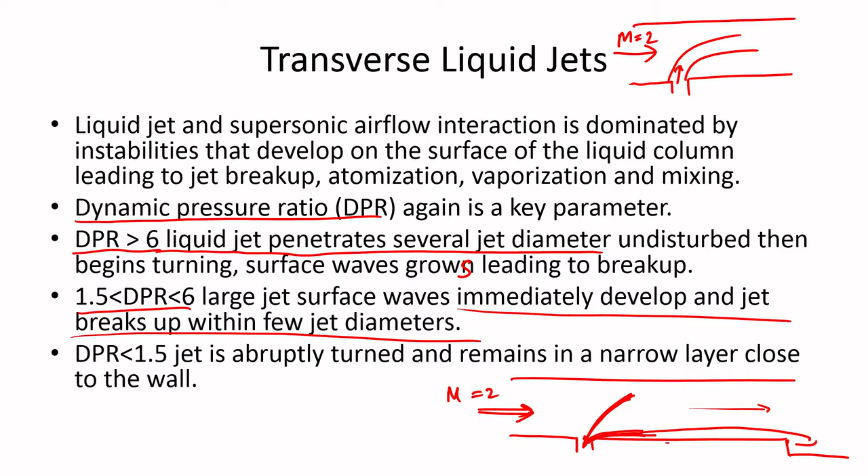Now, what fuel do you use? Of course, one can use different kinds of fuels like JP10, JP7, etc. But once again, to recap, we discussed jet fuels, which are essentially a mix of different things. The reason we come to Jet A is that we now want to understand what the characteristic ignition delay in a scramjet engine can be.

So, if Jet A is our choice, then we have to know the fundamental constituents of Jet A and what kind of surrogate fuel we can use to represent it, and then we can find the 0D ignition delay for that fuel-air mixture at scramjet-relevant conditions. That will give us some idea of how much time ignition takes and whether ignition is at all possible in a scramjet, where we have an approximate idea of the flow residence time scale.

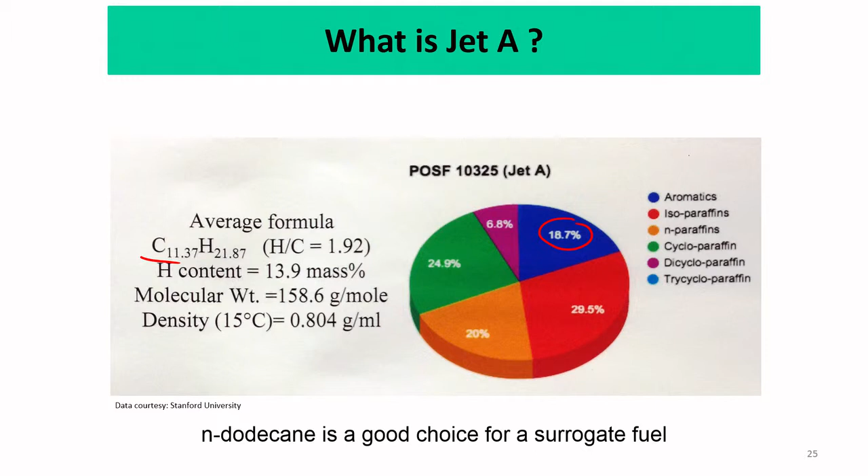So, what is Jet A? As we discussed before in the kinetics class, Jet A has an average formula of about C11.37H21.87. It contains a lot of different kinds of paraffins, n-paraffins, isoparaffins, etc. It has some amount of aromatics also, but the rest are reasonably paraffin. That is why people think n-dodecane is a good alkane to represent Jet A.

So, you have a negative temperature coefficient and your time scale is also quite large relative to the scramjet flow residence time scales. In a 1 meter long scramjet, if the flow velocity is 1 kilometer per second, the flow residence time scale is of the order of 1 millisecond. So, from the 0D ignition delay, where you have not considered mixing, atomization, evaporation, anything, the pure ignition delay for a homogeneous n-dodecane-air mixture undergoing auto ignition is itself 1 millisecond.

Okay. So that is why, but you have to understand that now if you want to design a scramjet engine, or you want to predict the performance of a scramjet engine which uses kerosene as a fuel, it is imperative that we use a detailed reaction model, because this time scale of 1 millisecond of this ignition delay and this NTC behavior that you see here cannot be captured by one-step chemistry. So that is why in scramjet engines it is often suggested to use detailed reaction mechanisms.

But of course if one is using a very reactive fuel like hydrogen, where these things are not important, then in that case one-step chemistry might be good enough. So once again, we discussed this before, just a recap. So now this gives us an idea of the auto-ignition timescales, which is about 1 millisecond.

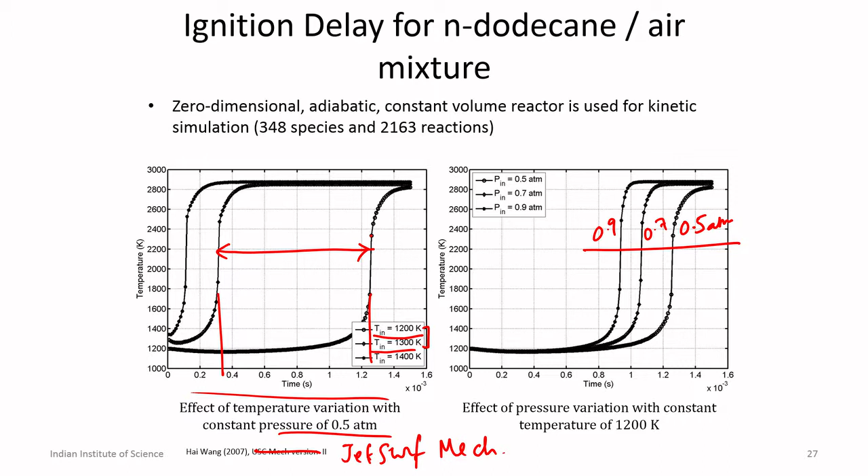But of course pressure has some effect, but it is not as sensitive as temperature. To recap, with a change of temperature of just 100 Kelvin, and in combustion 100 Kelvin is nothing, right? Just by a change of about 100 Kelvin, from 1200 to 1300, your ignition delay drops from 1.25 to essentially 0.3. So it's almost a factor of 4 drop in the ignition delay. This has to be remembered when you calculate the ignition delay time of a scramjet engine.

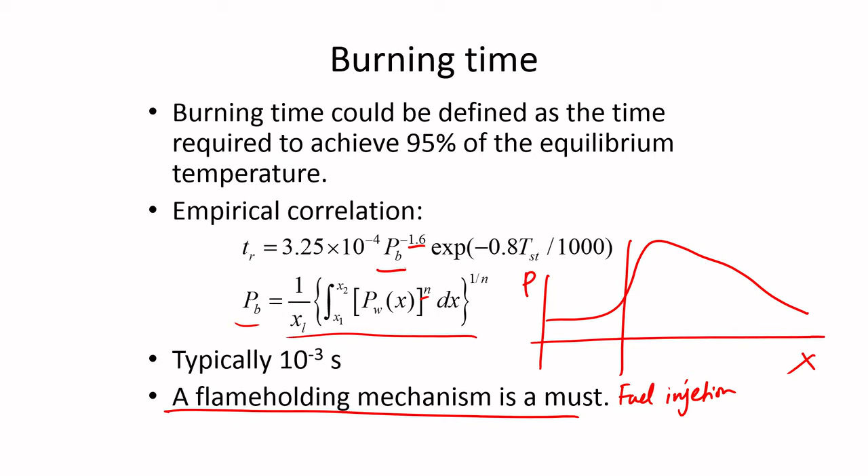In a combustor it might be even smaller than that. It's of the order of that. So it might be 1 millisecond, 2 milliseconds, 3 milliseconds to 10 milliseconds. So 1 to 10 milliseconds depending on the flow conditions. But if the burning time is of the order of 1 millisecond, then of course you cannot expect that you can just inject fuel into the oncoming high speed supersonic air at Mach 2 and it will burn on its own. And there we cannot have flame stabilization that way.

So this calls for a need of a flame stabilizer, and in scramjets you can have either a cavity stabilized flame or a strut stabilized flame, which will come. But before going into that, just to give you an idea of how the flame inside a scramjet looks. When you inject the fuel, as you have seen, that leads to the formation of a bow shock and surrounding the barrel shock, because the fuel jet poses an obstruction. So this is a hydrogen jet injection in a cross flow of air at about Mach 2.4 at static temperature of 1400 Kelvin. This comes from the work of Gamba and Mungal, recently published.

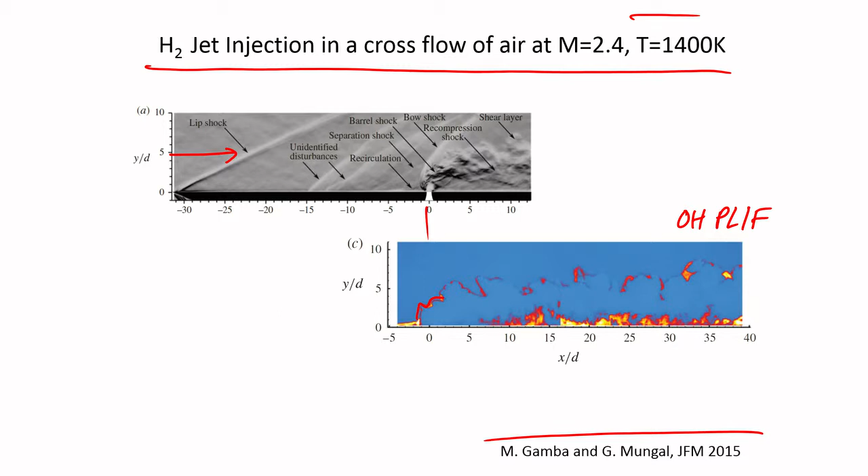So when you inject this hydrogen jet at this point, this is the OH PLIF images by the same technique we described previously. Due to the high temperature of this air stream, the flow is coming from here and you are injecting the jet here, and you see this bow shock forming, and then there's a barrel shock forming here, and of course there are different other structures forming all throughout. Now this jet induces compression, and this shock induces compression and also temperature rise, and that causes immediate auto ignition. Of course the actual static temperature of the flow is also quite high.

As you see here, this kind of flame is forming, but the flame that you see here is a very strange looking flame. The OH normally does not happen in bulk. Instead it is in a threaded form, like this. You see the flame being scattered all the way along, both in the front of the jet as well as in the back of the jet. And people think that this can be an example of the broken reaction zone regime. These flames belong to the broken reaction zone regime of the turbulent combustion regime diagrams that we have discussed.

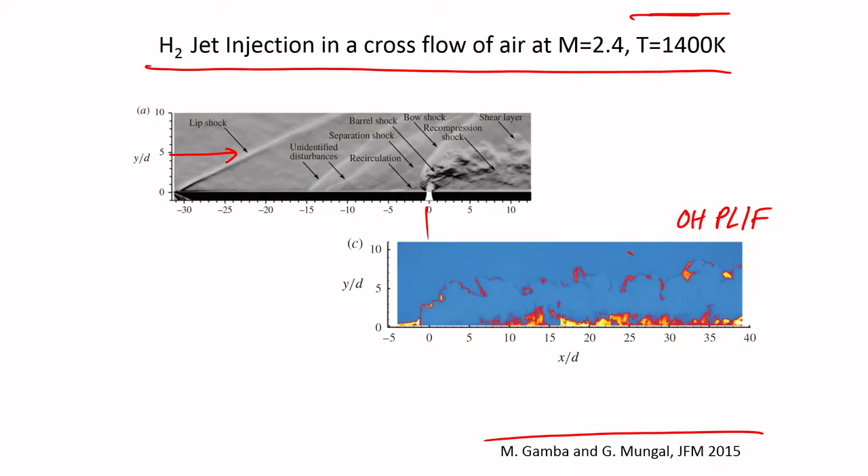So as such, that happens when the reaction time scales are much larger compared to the Kolmogorov time scales. That is when you get this kind of broken reaction zones, and people think that this is probably what is happening here. Now, as you see, if you just inject in this thing, it's very difficult to realize a robust flame. So that calls for a need of flame stabilization. One of the flame stabilization mechanisms is by using a cavity.

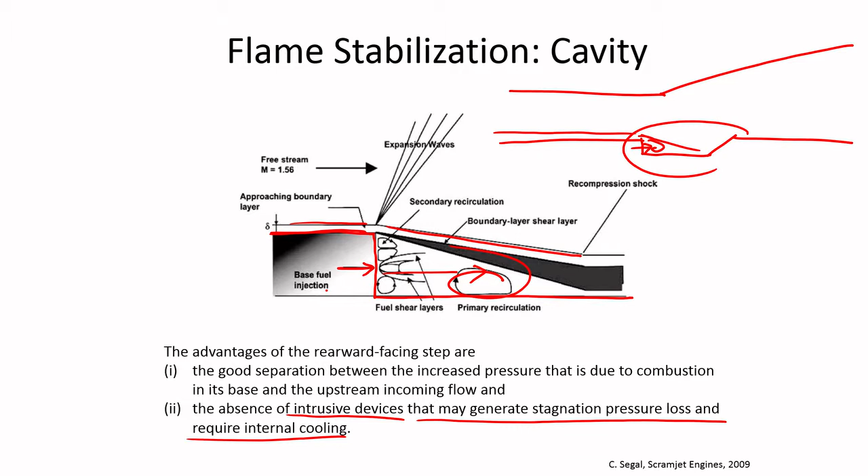Okay. The advantage of this kind of a rearward facing step cavity is that you can essentially shield the flow from the pressure rise that happens due to combustion. And second is the absence of intrusive devices. If you include a flame holder, that may generate stagnation pressure loss and might require internal cooling, because if you put a strut just like the bluff body we have seen before in the afterburner, the leading edge of the strut will see temperatures equal to the stagnation temperature of the flow, because the flow has been stopped there. And if that is of the order of 1600 to 1700 Kelvin, for long term operation you might need some cooling. And also it can lead to some pressure loss.

So, that is why some people prefer cavity, but the only issue is that in the cavity your combustion is restricted to the sides. So, the main flow does not see combustion. So, if you want to generate a lot of thrust by accelerating the flow, you have to somehow ensure that a lot of the main flow gets into the cavity, and you cannot have a very large divergence immediately, because then it can lead to flow separation. So, there are advantages and disadvantages of cavity, but this is definitely one of the two ways by which flame is stabilized inside a scramjet combustor.

So, the next one we will talk about is flame stabilization using struts. This work will report the DLR scramjet experiments reported by Guerra et al, and the computations have been reported by Genin and Menon in AIAA 2009. So, we will just examine this as a case of how a flame is stabilized by a strut in a scramjet type of combustor.

So, here we have a Mach 2 flow coming in from the left to the right, and the temperature is 340 Kelvin. So, you need additional ignition mechanisms, and the strut has a divergence angle of 12 degrees. And now, you see here you cannot place a bluff body like what you place in an afterburner. Because if you place a bluff body, immediately there will be a normal shock formed, and this normal shock will make the flow downstream subsonic, and the whole concept of the scramjet combustor breaks down. So, you have to design this strut very carefully; it can only have a very narrow edge angle, and it cannot block the flow too much. So, that needs to be carefully chosen.

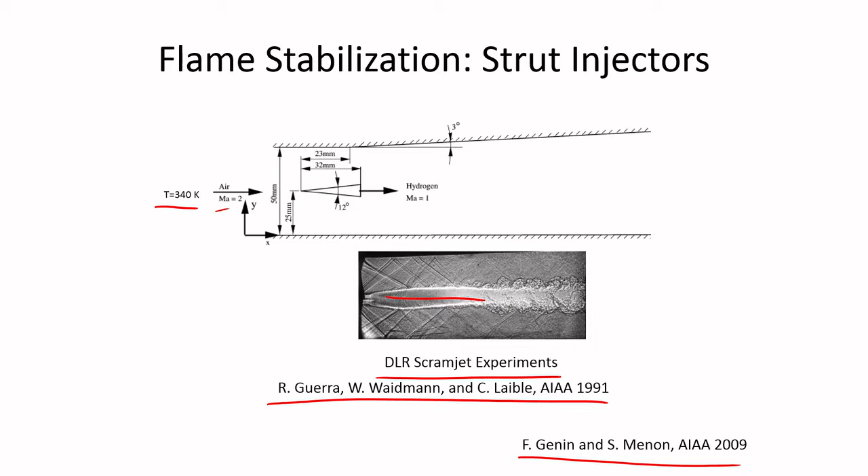Okay. So, here because it will have heat release, they had designed a combustor with a 3 degree divergence. As you see, the top wall and the bottom wall are not parallel. The top wall diverges at an angle of about 3 degrees, and the strut has a divergence angle of about 12 degrees, and from the center of the strut you are injecting hydrogen at Mach 1, whereas the incoming air is coming at Mach 2. So, this is how the Schlieren image of this hydrogen air flame looks like, but we will go into that.

So, now we have not really discussed large eddy simulations for doing compressible reacting flows. So, in this last lecture we will just show you that this kind of complex scramjet combustor can be simulated using large eddy simulations. So, large eddy simulation is kind of intermediate between direct numerical simulations and RANS.

So, for example, in direct numerical simulations you solve for all scales from the combustor size to the Kolmogorov length scales. In RANS, you solve for only the average, either the arithmetically averaged ensemble average variables or the Favre averaged variables.

In LES, what you do is solve for filtered variables. In these filtered variables, what is contained is the information from the larger scales to some intermediate scales which belong to the inertial range. So these barred variables, for example this rho bar, is essentially the non-density weighted filtered variable.

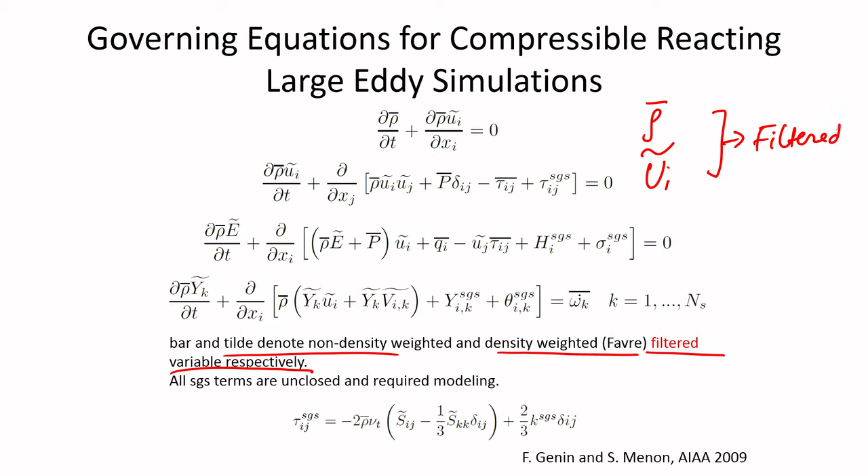So, in LES, large eddy simulation, you create first governing equations that describe the evolution of these filtered variables, and this tilde denotes the density weighted filtered variables. For example, U tilde here denotes the filtered variables. So with this you can capture large scale dynamics and have models for essentially the small Kolmogorov scales.

So, this is your continuity equation once again for this filtered variable U_i tilde. This is the momentum equation. You see the emergence of these tau_ij SGS terms. These are similar to the Reynolds stress terms that you encountered in RANS, and you have to essentially model for this. This is your energy equation, I will not go into that, and this is your species equation.

So, once again these equations look very similar to the actual governing equations, but they are more complex because they have many more terms due to these subgrid scale terms that arise, which are kind of like the Reynolds stress terms, the u_i u_j term, which you remember arrived when we averaged the Navier-Stokes equation. Similar to that, these terms arrive in the momentum equation, the energy equation, the species equation, and one has to have a closure model for that.

For example, in this case, this tau_ij SGS is closed by an eddy viscosity type of closure, and then you solve for this K SGS, similar to the K-epsilon model. But this is much more involved, and it gives you much more insight. So, this is just to show what these simulations can do, and they can capture very many of the interesting physics present in these kinds of flows.

So, here we are showing the density gradients obtained from these large eddy simulations, and often these are close to experiments and sometimes they are not. So, still now large eddy simulation for high speed turbulent combustion is a research topic. A lot of advancements have been made, but it is not closed, and there is room for a lot of work, both in developing algorithms or numerical schemes, and

in terms of fundamental understanding. So, what I want to show here is that we compare the density gradients from the non-reacting and the reacting flow. Of course, you see that they are different, but first let us look at the non-reacting flow part. Here the supersonic flow is coming from the left to the right, and here also the supersonic flow is coming from the left to the right.

So, as it comes from the left to the right, it encounters this wedge shaped body, and as it is deflected by the tip of the wedge, you have these two oblique shocks being formed. Let us call this A and this B. Now, as they impact the upper and lower walls, they reflect back towards the center line of the test section, and the impact of the shock on the upper wall occurs downstream of the location of the divergence.

So, you see that this shock interacts with the wall after the divergence has started. As a result, the whole shock structure does not remain symmetric with respect to the center line anymore. So this changes the symmetry, and you see that the center line of the shock structure has deviated from the center line of the constant area section.

So you see here that the impact of the shock on the upper wall occurs, of course, downstream of the location of the wall divergence, and as a consequence the oblique shock interacts with the upper wall expansion fan that is created at the corners of this flame holder. So these are the expansion fans which are created because the flow is diverging.

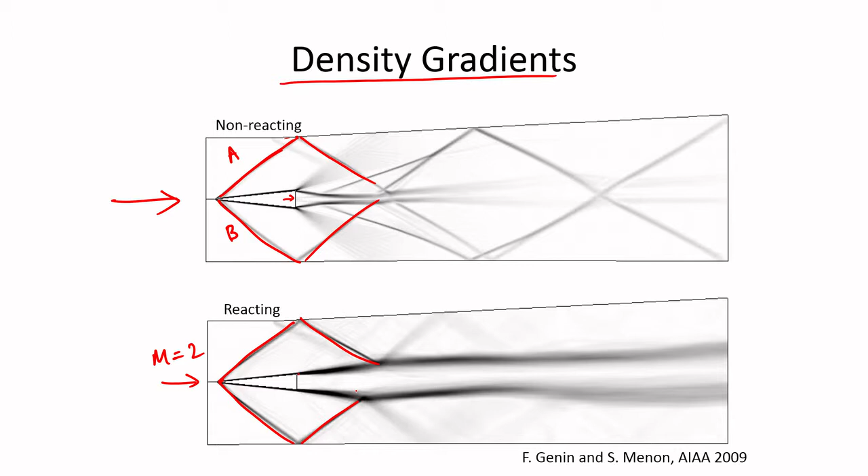So, this is the dynamics of a strut stabilized scramjet flame, and as you see here, if we extract the temperature profiles from different locations from the simulation, and validate that with the experimental measurements, the experiments do correlate well with the simulations.

Okay. So, this provides some amount of confidence in the simulations, but of course one has to be very careful. These simulations are hard simulations, and there is a lot of effort that goes into modeling as well as in the algorithm development for these kinds of things.

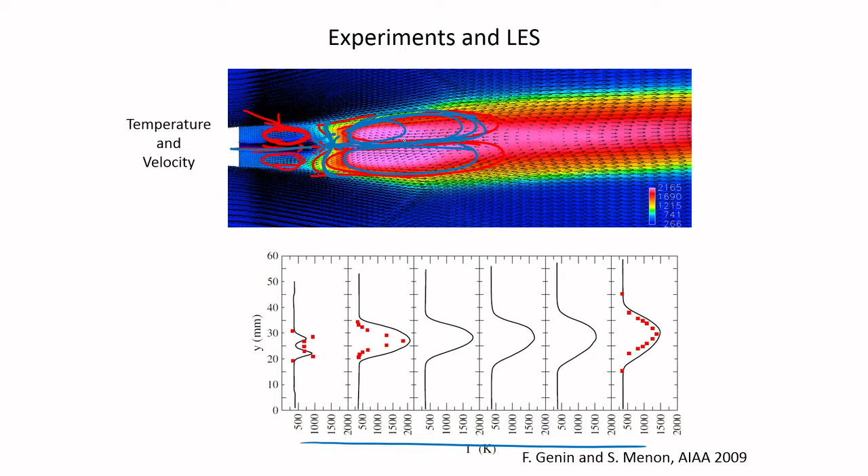So, with that we come to some of these instantaneous temperature fields and how they look. As you see, because the flame is stabilized here, and the recirculation bubble is formed here, you see in the instantaneous picture also that the flame is lifted up from the bluff body, unlike the case of subsonic flames, where the flame is attached to the bluff body.

Okay. Here the flame is lifted up from the strut, and that is happening because as the jet is penetrating, it meets with the recirculating products somewhere around, and that creates a stagnation zone, and that becomes the stabilization location of the flame.

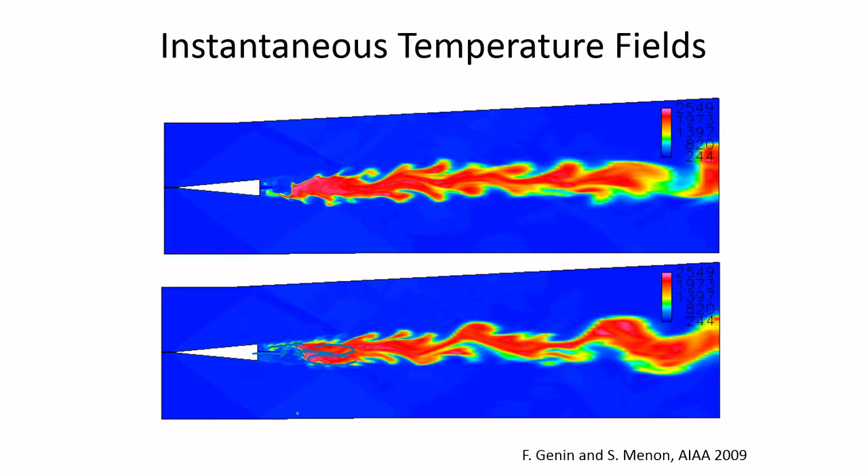But occasionally this flame structure that is formed due to some low velocity regions can penetrate, and it can get attached, but normally it is lifted up from the recirculation zone immediately downstream of the strut, and it forms its own recirculation zone downstream, which recirculates the hot products. Okay. So, this is typically the structure of the flame as you encounter in a scramjet combustor.

So, with that we come to the end of this discussion on scramjets, where we have discussed one dimensional frictionless flow in a constant cross section with heat addition. And we have seen that the addition of heat tries to push the Mach number of the flow more and more towards sonic. That is the most important consequence that we saw. And then we looked into the different design considerations of a scramjet engine.

We looked into the different phenomena involved in a scramjet engine, like what happens when you inject a gaseous fuel jet, what happens when you inject a liquid fuel jet, and the different mixing mechanisms that take place. And then we looked into the ignition delay times, which are often of the order of 1 millisecond, and often comparable to the flow residence timescales. We looked into burning time, and then the different mechanisms of flame stabilization.

We looked into cavity based and strut based flame stabilization, and how the shock structure interacts with the recirculation zone and the shear layers, and how it is different for a non-reacting case versus a reacting case. And if you inject hydrogen through a strut, how it changes the flame structure from normal bluff body stabilized flames, and you can have a stable lifted flame a little further downstream of the strut, unlike subsonic flow, where the flame is attached to the strut.